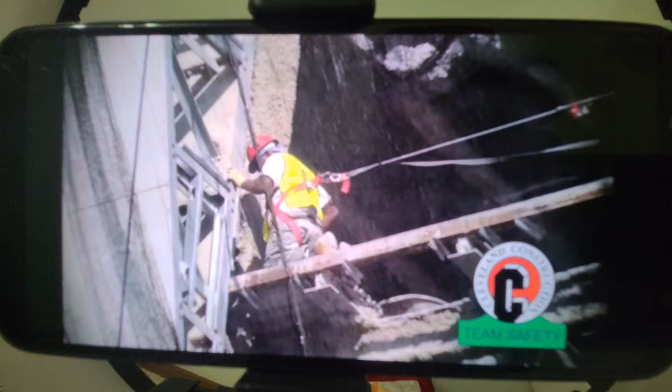Cleveland Construction has developed a program we call Job Hazard Analysis. We begin each day by examining the workplace conditions and the tasks to be performed to identify potential hazards, so that we can plan to control or eliminate them before work begins.

The Occupational Safety and Health Administration, also known as OSHA, the agency that regulates workplace safety, states that the job hazard analysis is a technique that focuses on job tasks as a way to identify hazards before they occur. It focuses on the relationship between the worker, the task, the tools, and the work environment. Ideally, after you identify uncontrolled hazards, you will take steps to eliminate or reduce them to an acceptable risk level.

So it should be clear that safety is the #1 priority of Cleveland Construction's employees, on and off the job site. All of our job site managers are certified competent persons.

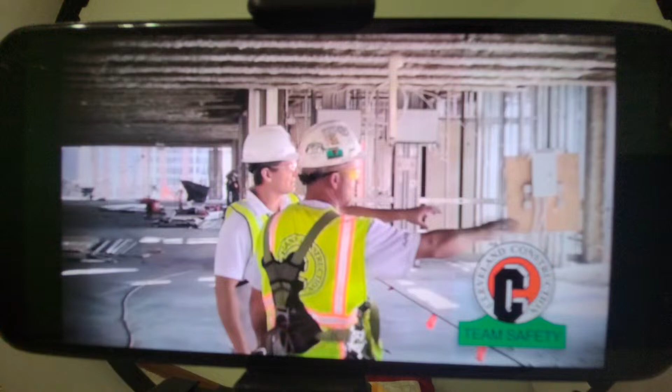OSHA defines a competent person as one who is capable of identifying existing and predictable hazards in the surroundings or working conditions which are unsanitary, hazardous, or dangerous to employees, and who has authorization to take prompt corrective measures to eliminate them. Because our managers are certified as competent persons, you can be sure that they are skilled at directing the work on our job sites with a trained eye for the hazards associated with that work.

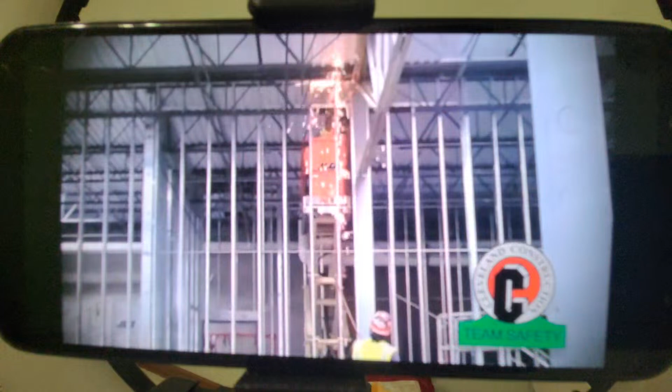Your responsibility while working on our job site is to participate in the job hazard analysis meetings. The job site managers or competent persons of this job site have developed this work plan each day to identify hazards you will encounter. Because a construction site is continuously changing, everyone involved with the work being performed should contribute to helping identify potential hazards to make the JHAs as productive as possible.

Please pay full attention to this video so you fully understand what is expected from you as you perform your work. If anything in this video is unclear or confusing, talk with your supervisor prior to going to work.

This video should be viewed as a training program to prepare you to perform routine tasks on our construction site in a safe manner. If you have any questions or concerns after viewing this video, please bring them to the attention of the competent person in charge.

Lesson number 1, personal protective equipment.

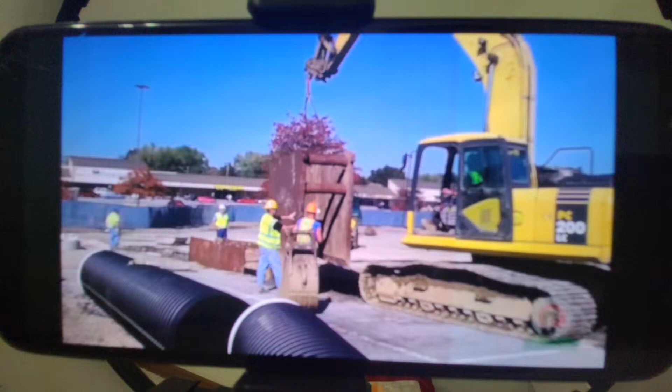Anyone working on a construction site should be aware that it is a very dangerous occupation, and you must prepare to defend yourself every moment of the day. To best defend yourself, you will need several pieces of equipment developed for the construction worker. Cleveland Construction requires you to wear certain equipment all day because threatening events are frequent and very random. Other equipment will be required on an as-needed basis.

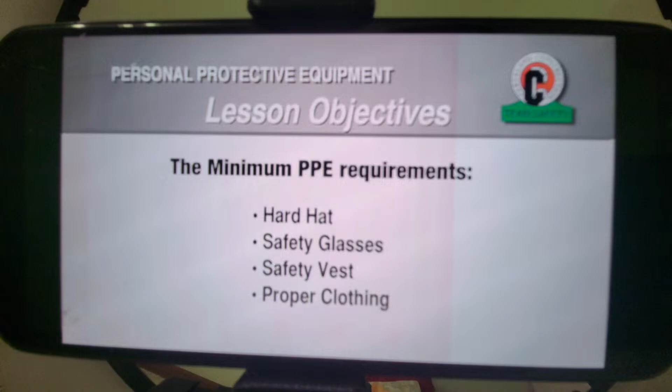When you have completed this training section, you will understand the required and optional personal protective equipment, how to use and care for selected personal protective equipment, and how to properly inspect your personal protective equipment. The following personal protective equipment is the minimum requirement to enter a Cleveland Construction job site.

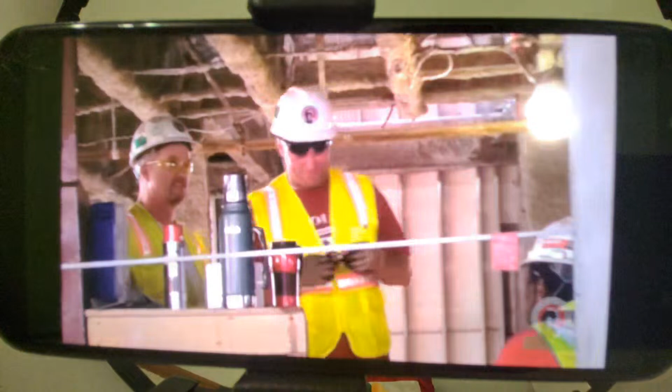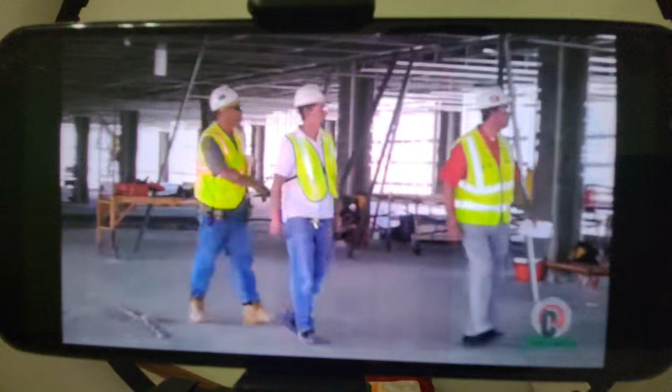Hard hat. Cleveland Construction will issue a hard hat to you before you begin work. The hard hat is to be worn at all times on the job site. Make sure you properly inspect for any cracks or damage before you begin work each day. You may have to adjust the headband for a good snug fit. The hard hat is to be worn with the largest part of the brim in the front and over your eyes.

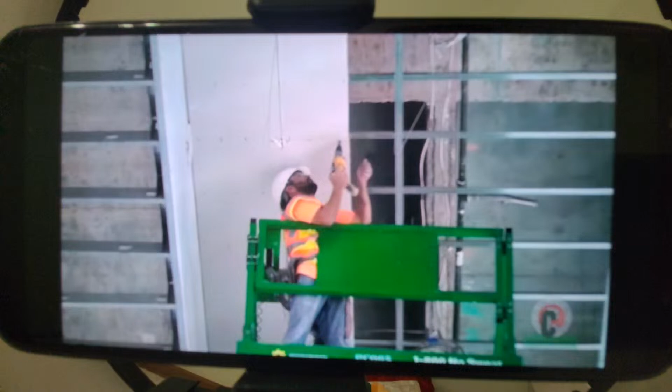Safety glasses. On a construction site, there is always debris being propelled into the air by job site tools and activity.

Safety glasses must be worn by all field personnel at all times, regardless of work activity. Standard safety glasses will be issued to all employees. However, if you purchase your own equipment, it must be approved for the intended task by your supervisor.

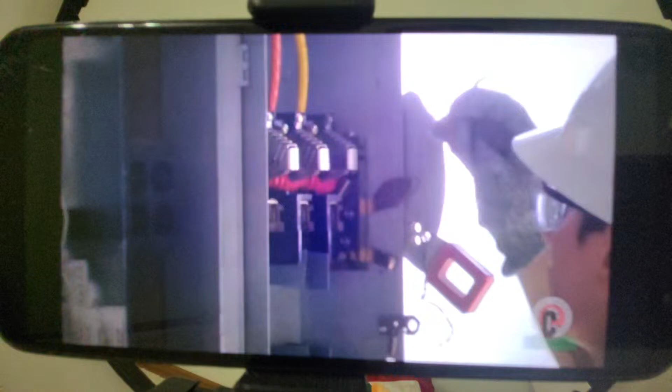There are various types of lenses intended for different work elements. Clear lenses are used for most work situations. Amber lenses are very useful in lower light work areas, and gray tinted sunglass style lenses are used for outdoor work in direct light. We will also provide safety glasses to be worn over prescription eyeglasses. Lens cleaning towelettes are available to keep safety glasses clear and reduce scratches.

Proper clothing. All workers are required to be properly clothed for a Cleveland construction job site, which includes a shirt with at least a 4-inch sleeve, long pants, and hard-soled shoes. A 6-inch high work boot is recommended because it helps to prevent ankle twists and sprains.

Employees are also required to wear a safety vest or high-visibility shirts or outerwear. Some tasks may also require long sleeves and/or steel-toed shoes. Cut-off shirts, tank tops, muscle shirts, or tennis shoes are not permitted, along with loose clothing, baggy shirts, ripped, tattered, or dragging work pants. Other task-specific personal protective equipment you may need include hearing protection, respiratory protection, hand protection, face shields, and safety harness.

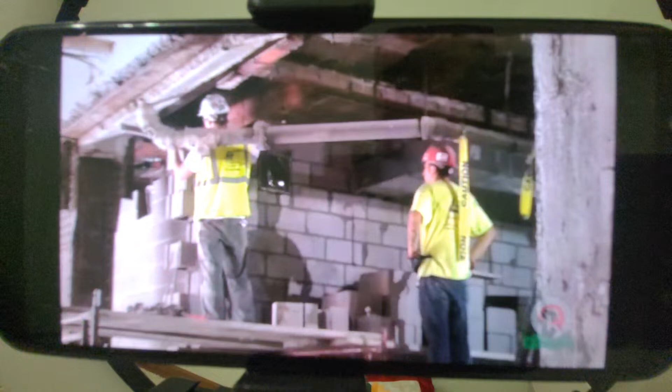Hearing protection. It is mandatory to wear hearing protection when you are near any tools, equipment, or machinery that emit loud or shrill noises. Earplugs or earmuffs must be worn when using powder-actuated or gas-powered tools. Standard construction site rules state that if you are within 2 feet of someone and you need to shout to communicate, hearing protection is probably needed.

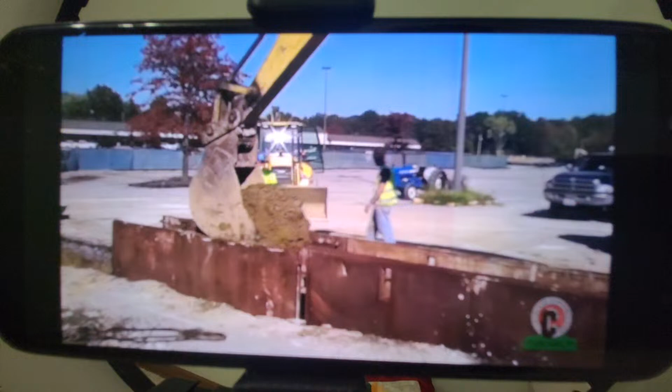Remember, if your ears are damaged by loud noises, they cannot be fully restored to their original efficiency.

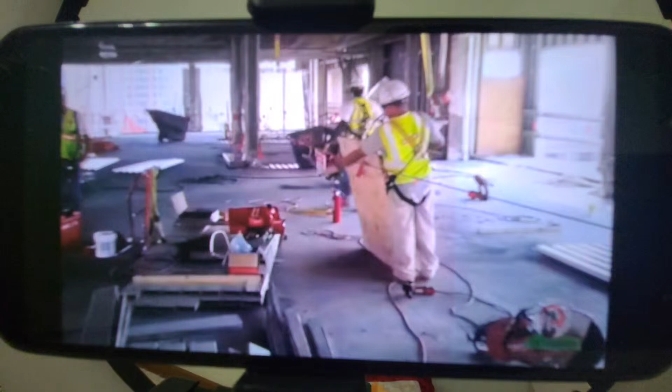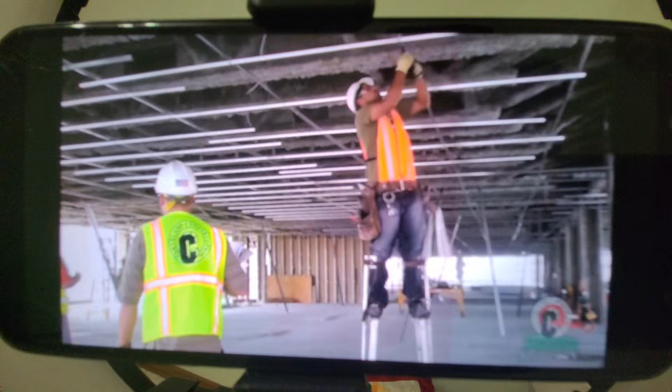Respiratory protection. Although respiratory protection is not required by Cleveland Construction for the customary work we perform, we have established a voluntary respirator use policy. We will supply an N95 dust mask to any employee looking for an additional level of comfort and protection while working with fiberglass, fireproofing, sanding drywall, sweeping the floors, or handling lead-lined drywall upon your request. All other requests for a respirator will be evaluated on a case-by-case basis. If you have any concerns regarding respiratory hazards, talk with your supervisor.

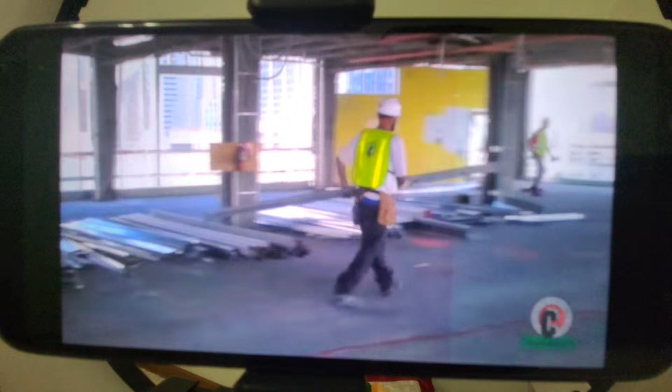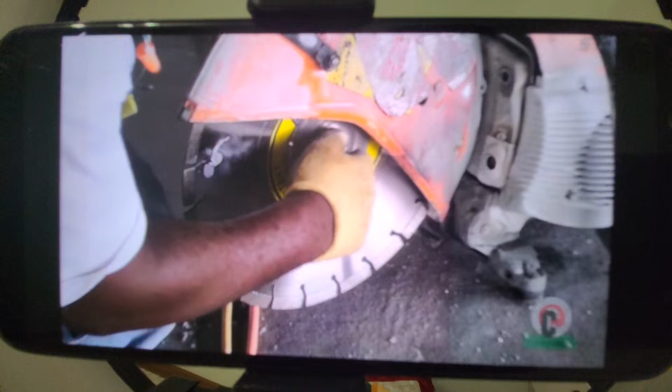Hand protection. Cleveland Construction supplies several types of gloves to defend against cuts and damage to your hands when handling materials or equipment. Gloves should be worn during cleaning operations, when working with fiberglass, lead-lined drywall, cutting metal studs, and as directed by your supervisor. When wearing gloves near moving parts, be mindful that they can get caught and pull your hand into danger. If you have any concerns on whether or not you should be using gloves while performing your work, talk to your supervisor.

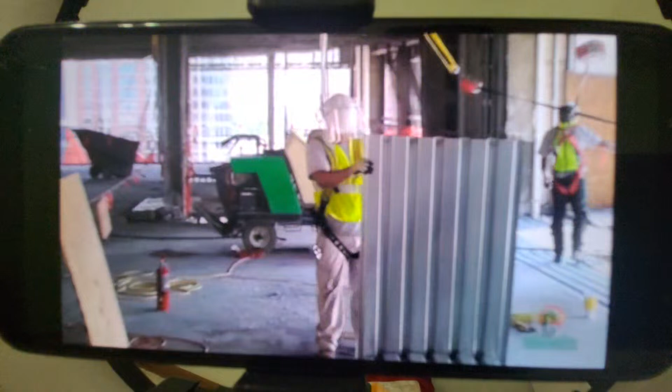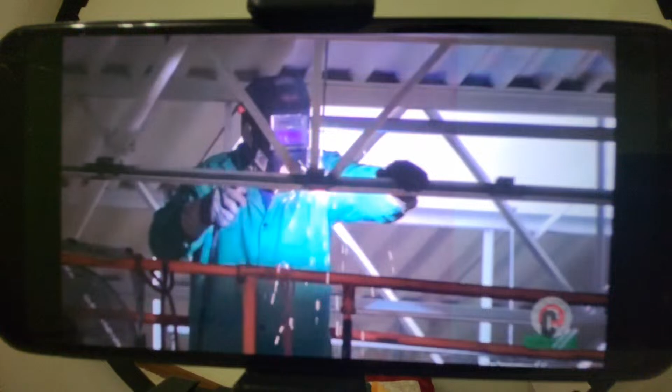Face shields. A full-faced shield shall be worn in addition to safety glasses when working in an area with flying or floating debris, such as operating a chop saw, disaster saw, or grinder. In addition, an approved welding hood with a face shield must be worn during all welding operations. When working with spark-producing activities, you are required to have a fire extinguisher in your immediate work area.

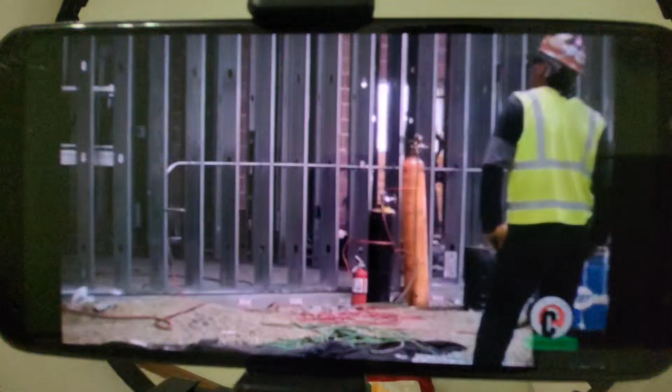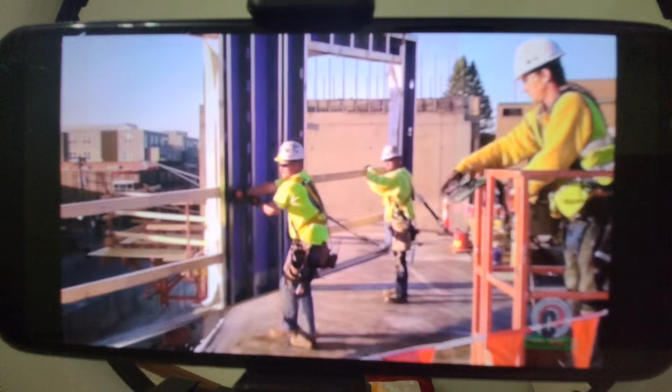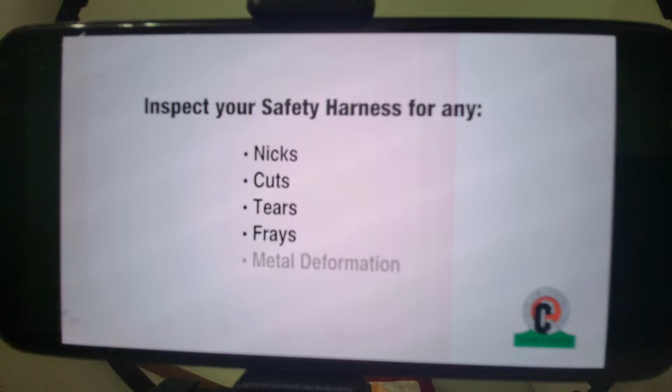Donning a harness. Occasionally, you will be required to wear a full-body harness as part of the fall protection system. It is important to wear this equipment properly, as improper use can result in serious physical harm. Before donning your harness, be sure to inspect for nicks, cuts, tears, frays, and any deformation of the metal components. If you suspect your harness of being deficient in any way, bring it to the attention of your supervisor.

Remember to follow these steps when donning a harness. Step 1: Hold the harness by the D-ring and shake it to allow all of the straps to fall in place. Step 2: If the chest, leg, and/or waist straps are buckled, release the straps and unbuckle them at this time. Step 3: Slip the harness over your shoulders so the D-ring is located in the middle of your back between your shoulder blades. Step 4: Pull the leg strap between your legs and connect it to the opposite end, then repeat with the second leg strap.

Step 5: Connect the chest strap and position it in the mid-chest area, then tighten it to keep your leg and shoulder straps taut. Step 6: After all straps have been connected, tighten all buckles so that your harness fits snug but allows for full range of movement. Finally, pass the excess strap through the loop keepers.

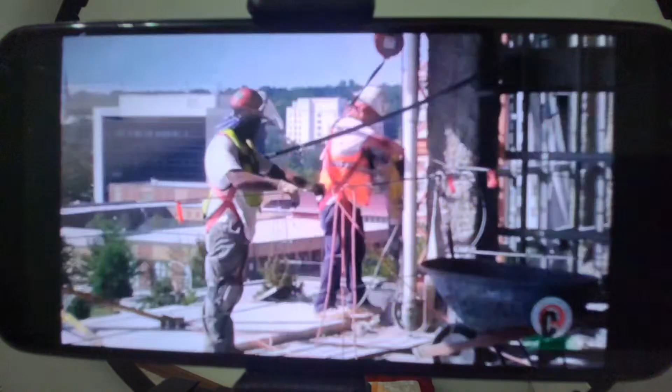Additional safety equipment used for fall protection, such as lanyards, lifelines, and others, will be reviewed in Lesson 3, Fall Protection. It's very important to thoroughly inspect all personal protection equipment daily. Use it properly, and always wear your equipment when it is required.

Let's do a quick review of this lesson.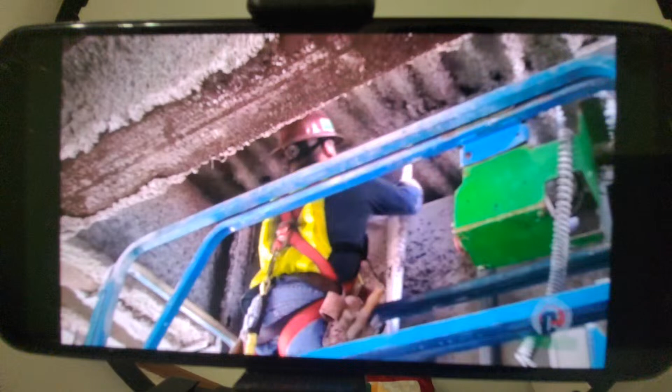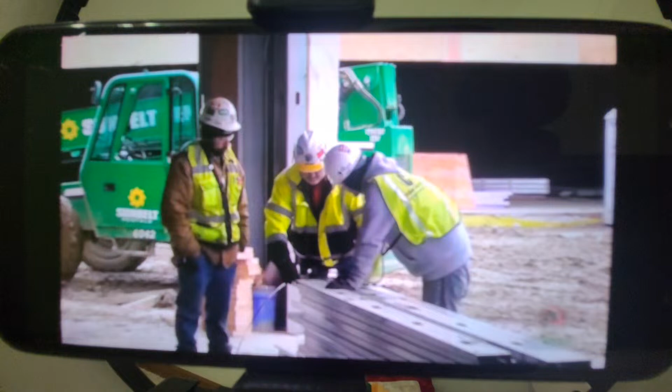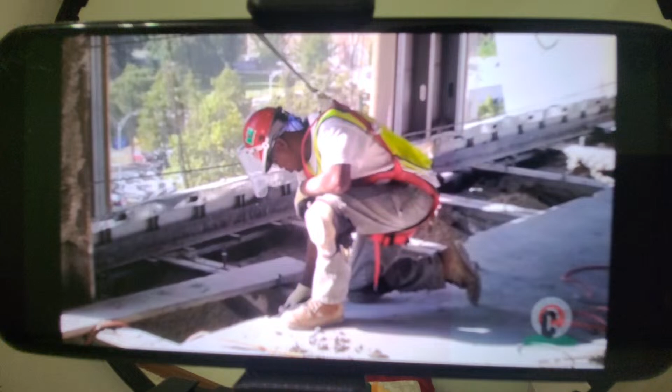Remember that potentially dangerous situations exist on every job site, and personal protective equipment is developed to protect you from serious workplace injuries. Cleveland Construction requires that hard hats and safety glasses are to be worn at all times on the job site. Under our voluntary respirator use program, we will provide an N95 dust mask for extra protection upon your request. Always remember to inspect your personal protective equipment before using, as it is your last line of defense. Think about the work to be performed to ensure you have the proper equipment to protect yourself.

Lesson number 2, Fall Protection.

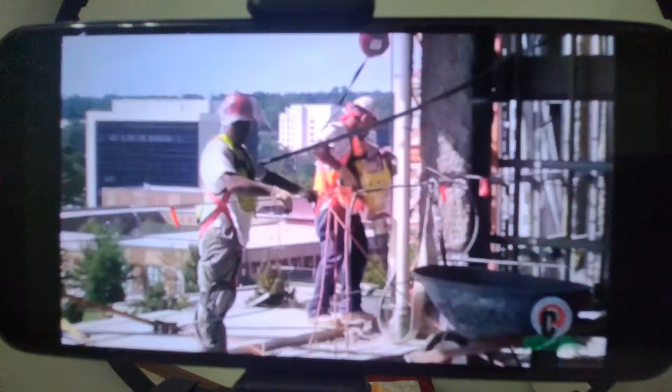In the construction industry, falls are the leading cause of worker fatalities. Each year, on average, between 150 and 200 workers are killed, and more than 100,000 are injured as a result of falls at construction sites. Consequently, OSHA has identified falls as one of the top 4 types of fatalities, along with struck by, caught between, and electrocutions. These 4 injuries are known as the Focus 4.

Cleveland Construction Incorporated has joined OSHA to inform you about these hazards, the methods used to isolate these conditions, and supply the equipment necessary to protect you. Upon completion of this training section, you should understand the hazards of falling, various fall protection systems used on the construction site, and the personal equipment available to employees to protect them from falls.

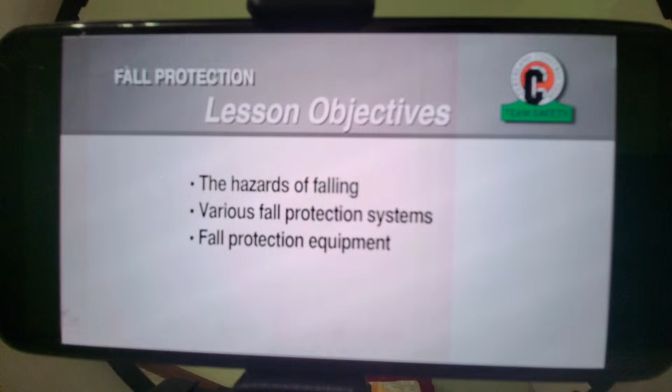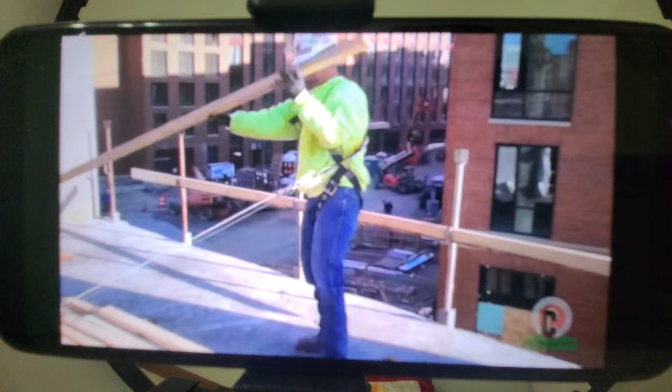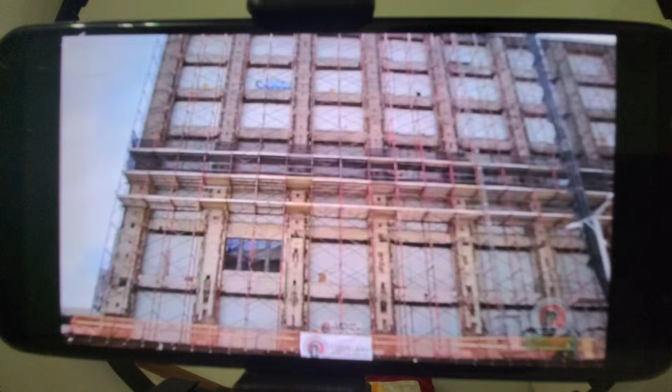Trigger height for fall protection. OSHA has established that construction workers who are on a working or walking surface and are exposed to a potential fall of 6 feet or more must be protected with the use of guardrails, safety net systems, or a personal fall arrest system. When working on a scaffold, those same protections are required when the work platform is more than 10 feet above a lower level.

Safety net systems are seldom used in commercial construction and most often used for bridge work. For this reason, we will focus our discussion on the guardrail and personal fall arrest systems.

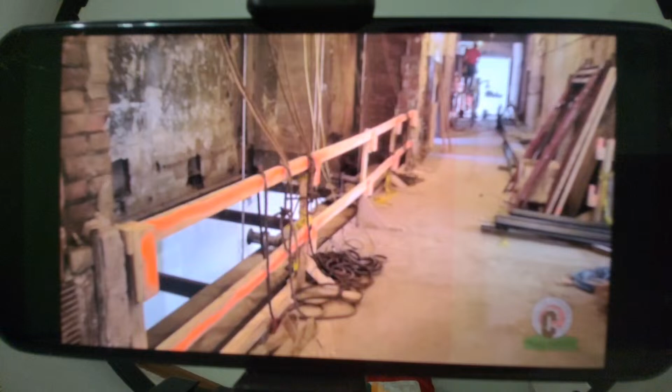Guardrails. The most common form of fall protection used around the perimeter of a structure and around large floor openings are guardrails. They are commonly constructed according to rigid specifications and made of 2x4 wood construction or steel cabling.

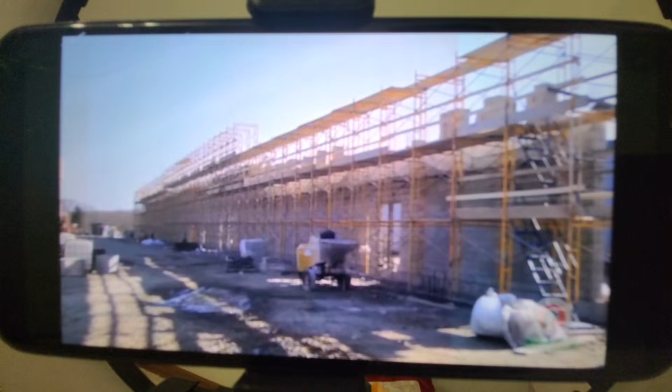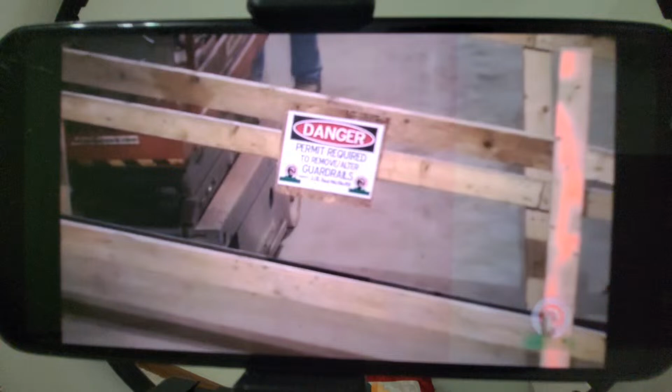Guardrails are usually made from the same steel used for the scaffolding frame. Occasionally, wood 2x4s or chain material may be used on scaffolding. Regardless of the materials used, all guardrails must be constructed to meet the rigid specifications to offer the same degree of protection. Although it is not necessary for you to know the exact specification of the installation of guardrails or scaffolding, you must know if the guardrails appear to be adequate.

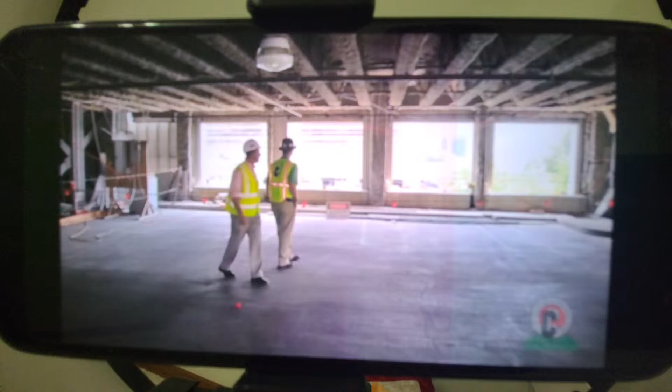To be adequate, the top rail of the guardrail, or top cable if wire rope is used, is to be set about 42 inches above floor level, or about waist high. If any part of the guardrail or cable sags below 39 inches, employees cannot work until it is repaired.

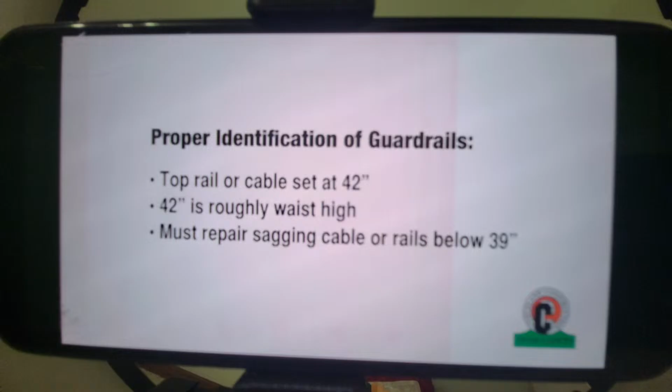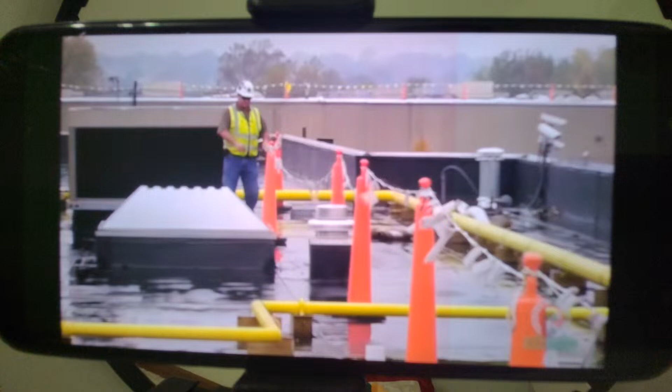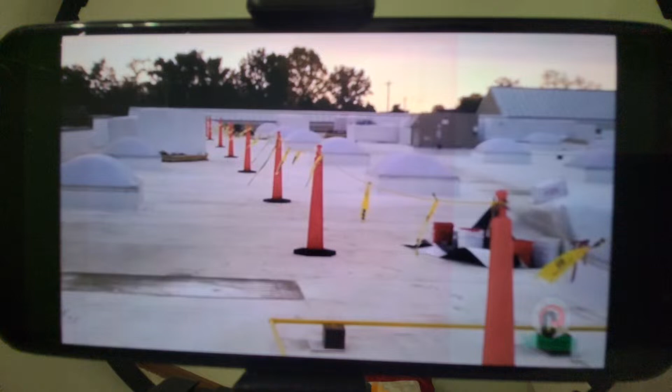You will occasionally see what appears to be a flimsy guardrail system. They are not guardrails and are not built to the guardrail specifications. They are constructed using rope, wire, or chains strung from stanchion to stanchion and are identified with bright colored flags or ribbons. These areas are being protected with a warning line system or as a controlled access zone. They are set up under special conditions to keep workers away from dangerous areas such as unprotected building edges, floor openings, and bricklaying operations, to indicate that fall protection is required beyond that point, or that only trained, skilled workers are permitted beyond that point.

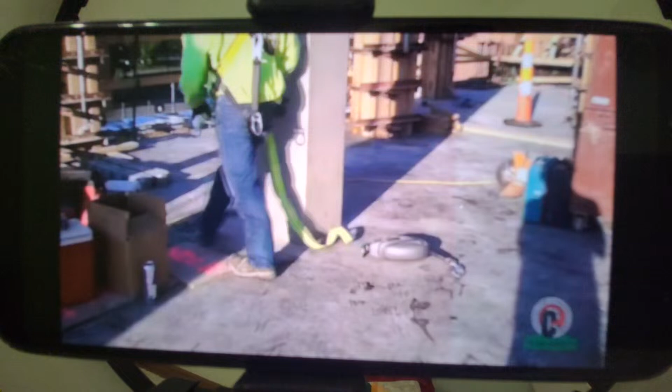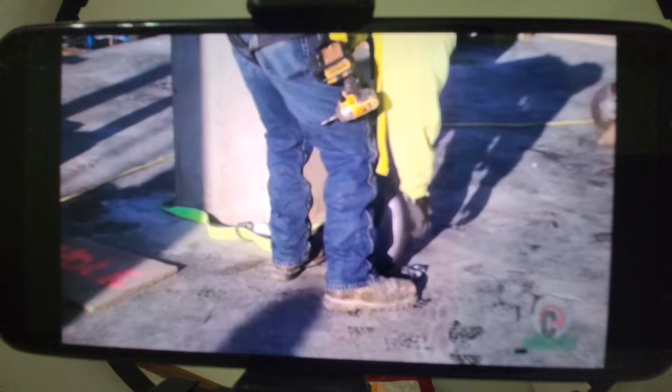If it is necessary for you to work inside a warning line system, you will be required to be tied off to the structure with a personal fall arrest system, and only workers with the proper training can enter a controlled access zone. Personal fall arrest system.

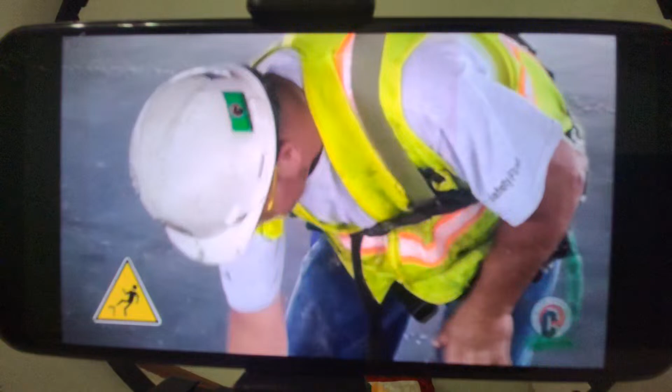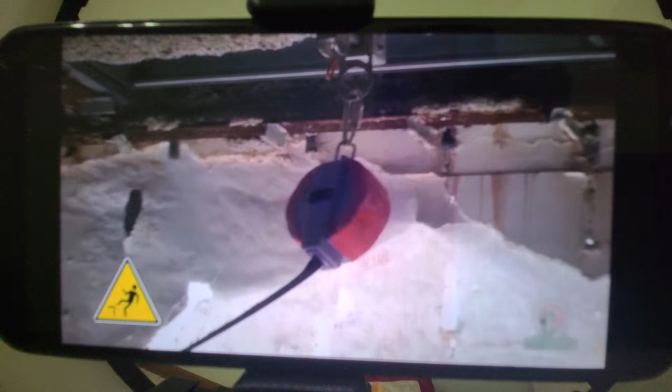A personal fall arrest system consists of a full body harness connected to a lanyard with a deceleration device connected to an anchor point. When this equipment is set up properly, it will not permit a free fall of more than 6 feet, because in a fall you increase speed, which places more stress on the equipment and causes a greater jolt to your body.

For this reason, it is necessary to attach the equipment so as to take as much slack out of the lanyard as possible by attaching to an anchor point over your head. Let's take a better look at each piece of equipment.

Full body harness. This is a garment made of rugged nylon straps that is worn by the worker that will cradle his body if he should fall.

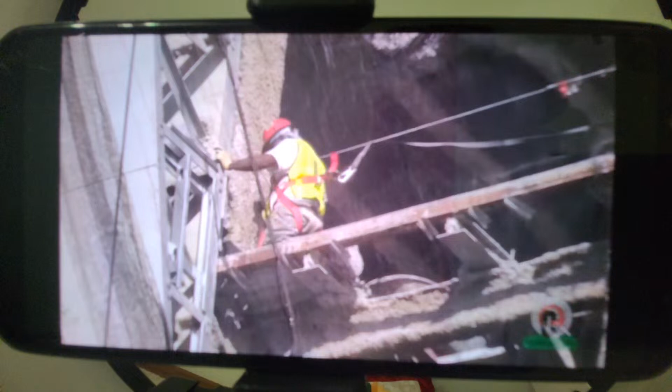Adequate supplies of these items of personal protective equipment, PPE, are on the job site solely for the protection of our employees. If the equipment is not offered to you and you feel that you are exposed to a fall, ask your supervisor for the equipment before you begin work. We know that you must feel safe and comfortable to produce good work.

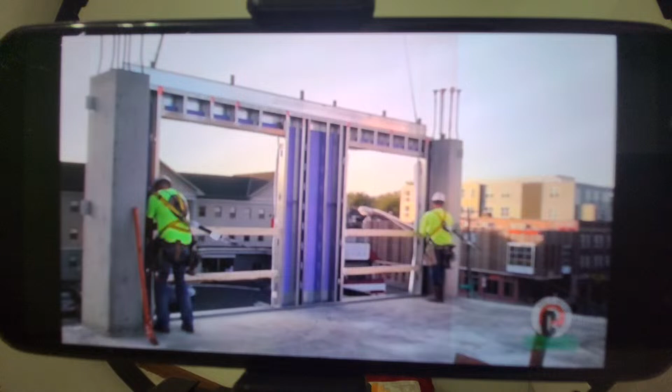When you use a harness, make sure that you use all of the adjustable features to snug the harness to your body in case you fall.

Lifelines. A vertical lifeline is a long rope usually attached to the roof of the structure and hangs down the side of the building, so when working on a swing stage, you can use a special device called a rope grab to attach your lanyard to the lifeline, completing the fall protection system.

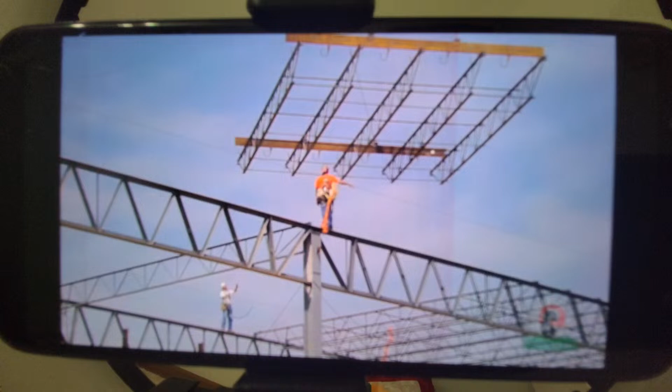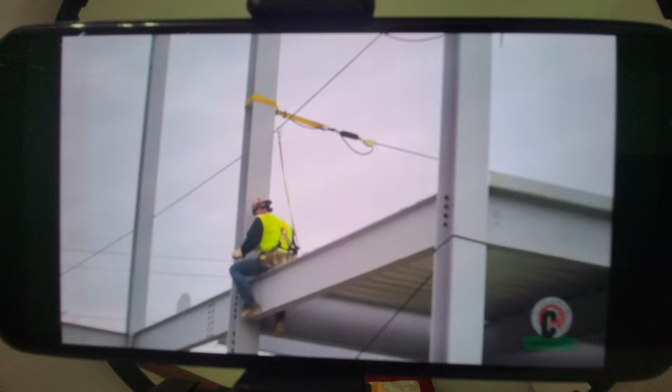A horizontal lifeline is a long rope that has both ends attached to two parts of the structure using a tie-off adapter, allowing usually two workers to attach their lanyard to O-rings on the rope to complete the fall protection system.

Lanyards. Lanyards are available in either a fixed or a variable length style, sometimes called an adjustable or retractable lanyard. The lanyard is designed so that one end can be attached to the D-ring on the back of the harness, and the other end is attached to the anchor point.

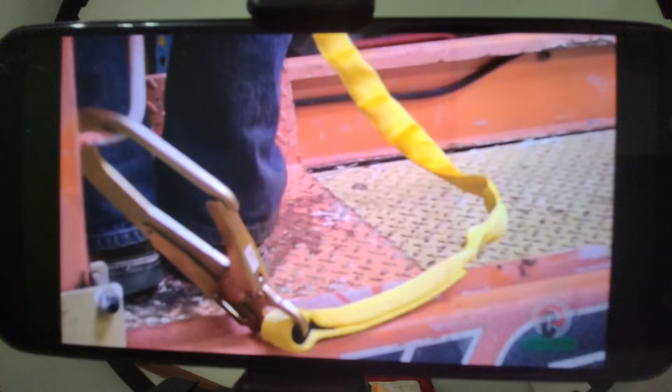The major consideration for selecting the style and length of a lanyard is freedom of movement for the worker and limiting the free fall distance as much as possible.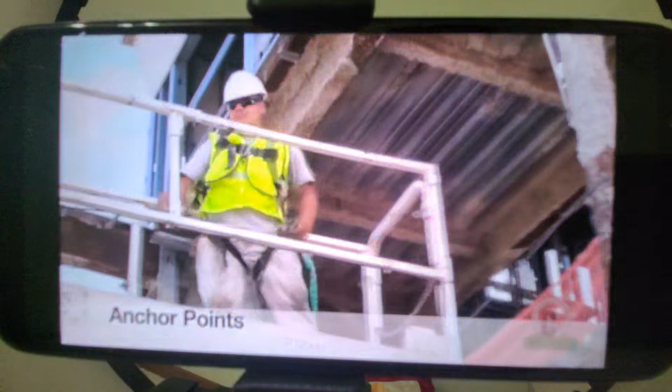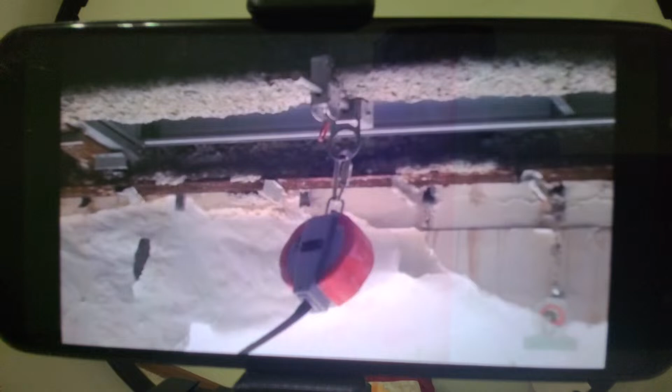Anchor points. Occasionally, the structure and the personnel lifts will be designed with a built-in anchor point. Otherwise, it is necessary to establish an anchor point with the use of a portable device designed for this purpose. An anchor point must be capable of supporting 5,000 pounds, so the equipment used must be designated for that capacity. There are several portable anchor items manufactured to meet the specifications.

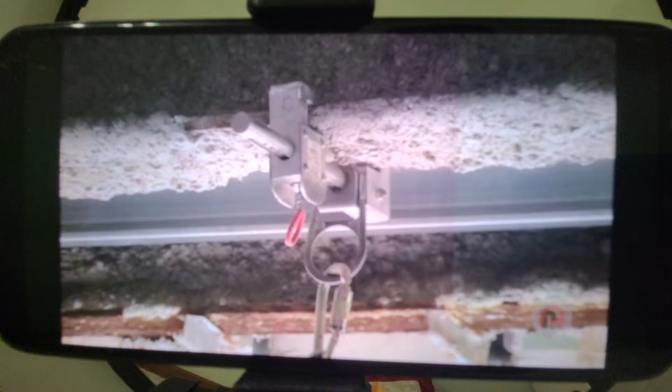Tie-off adapters are woven nylon belts designed to be wrapped around substantial parts of the structure. Beam clamps attach to the bottom flange of an I-beam. Concrete anchors are drilled into set concrete, and roof anchors can be installed into almost any roof.

Falls on the same level. Trips, slips, and falls from walking and working surfaces account for 15% of all accidental deaths in the construction industry.

These simple housekeeping steps will prevent such accidents. Keep all walking and working areas clean, dry, and free of clutter and debris. Keep materials and supplies neatly stacked.

Holes must be covered with a material capable of supporting at least twice the weight of employees, equipment, and materials that may be imposed on the cover at any one time. All covers shall be color-coded or marked hole or cover and fastened to prevent displacement.

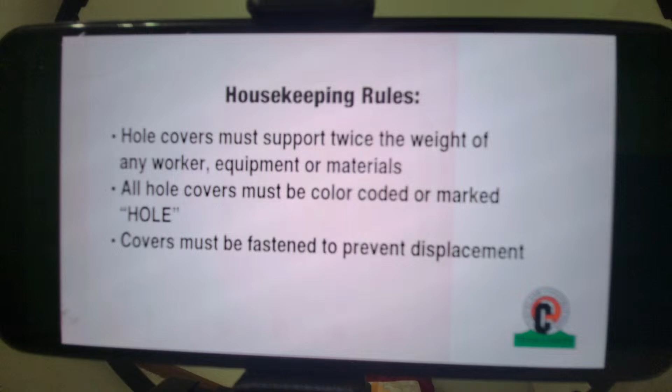Special attention must be paid to housekeeping and keeping working areas clear when any work is performed on stilts. Follow the manufacturer's recommendations on the safe working height for the stilts used.

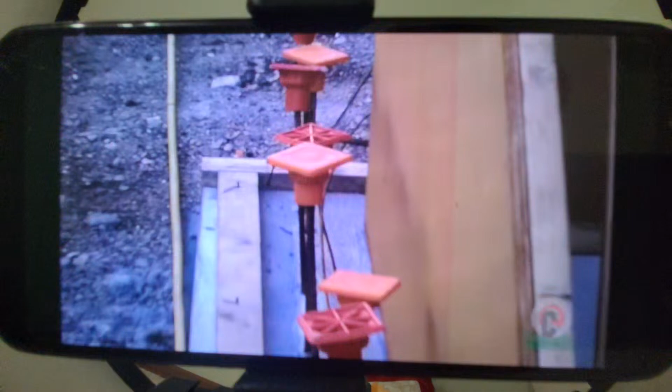Impalement hazard. When working above protruding reinforced steel, additional protection against impalement will often involve the use of steel reinforced covers or wooden troughs.

Falling objects. To protect yourself from falling objects, Cleveland Construction requires you to wear your hard hat at all times. There are additional measures that need to be in place to ensure that objects do not fall onto people working or walking below during construction.

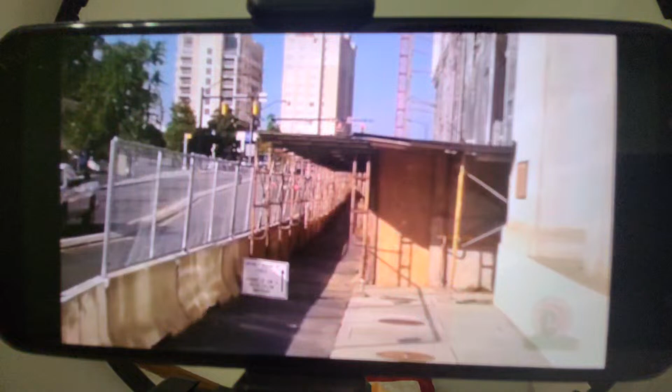The following are controls to prevent or minimize the risk of falling objects. Mesh, toe boards, and screens provide falling object protection to people below. Canopies can be used between the falling object hazard and employees and must be strong enough to withstand the impact forces of potential falling objects. Barricaded areas are sometimes established to keep workers out of areas where objects or materials may fall.

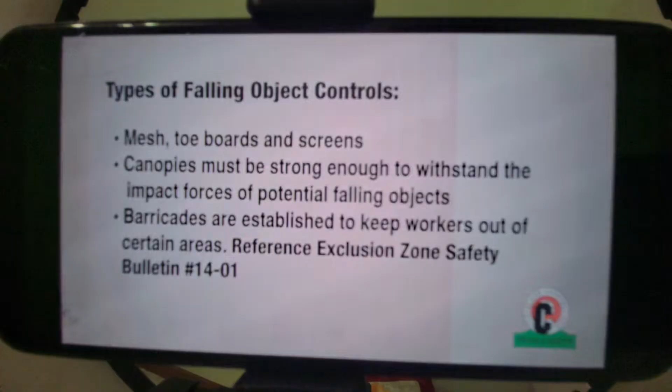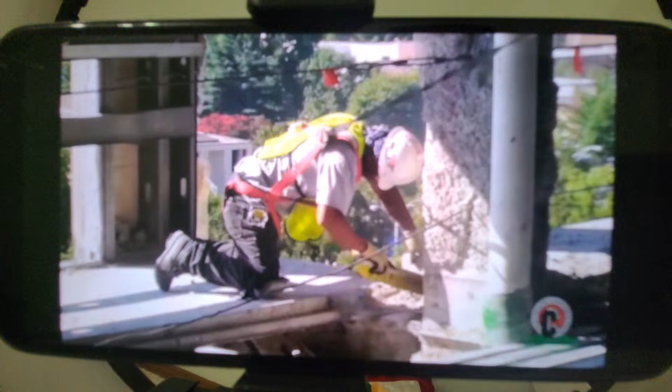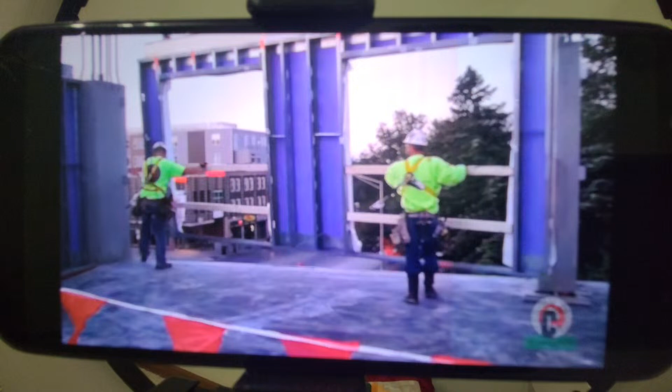Let's do a quick review of this lesson. Falls are the top cause of fatalities on construction job sites. Always wear and use the proper fall arrest equipment. Respect warning lines and controlled access zones. Cover and secure floor openings and maintain a neatly organized work area to prevent slips and trips. It is ultimately your responsibility to pay close attention to what is happening around you at all times.

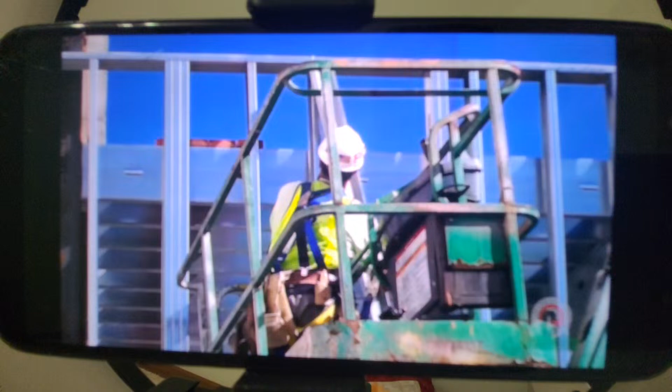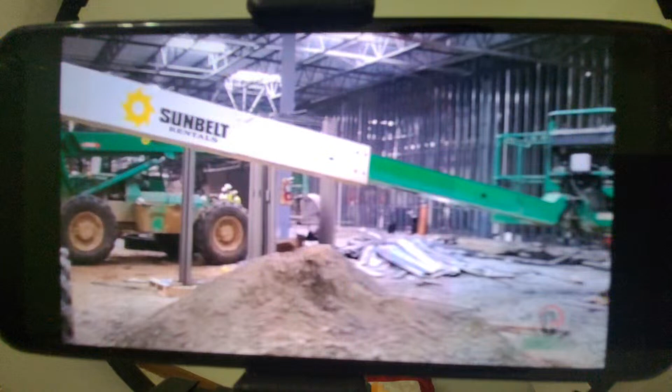Lesson number 3, elevated work platforms. In many situations, employees are required to perform tasks on elevated levels. Elevated work platforms pose fall hazards. There are many different styles and safety operations of lifts designed for various locations and conditions. Knowing the safe operation for elevated work platforms will eliminate injuries and save your life and others.

When you complete this training section, you will be familiar with some of the most common types of elevated work platforms you will encounter on the job site. Understand the safe operation and use of various elevated work platforms. Be able to identify which elevated work platform is most appropriate for the task. And understand which elevated work platform operations require additional training.

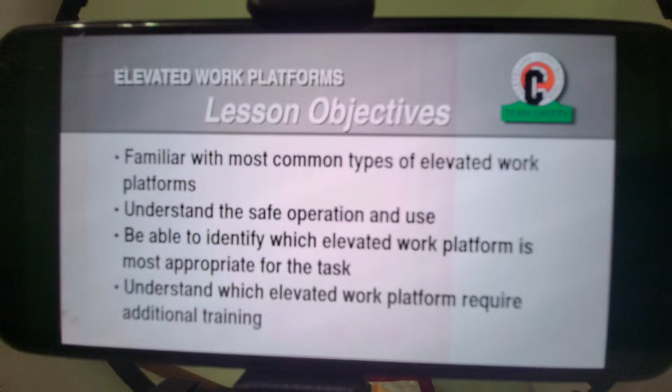Cleveland Construction uses several types of elevated work platforms to raise workers up to higher work areas. The most common elevated work platforms are ladders, scaffolds, personnel lifts, and stilts.

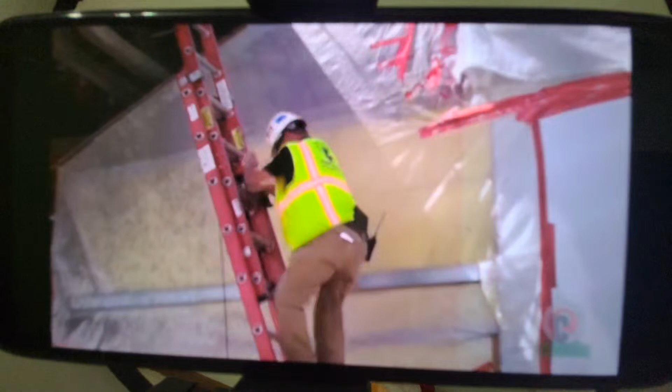Ladders. There are two basic types of ladders you will encounter in your work: the extension or straight ladder and the step ladder. Take the time to analyze what type and size ladder is best suited for you to safely perform your work.